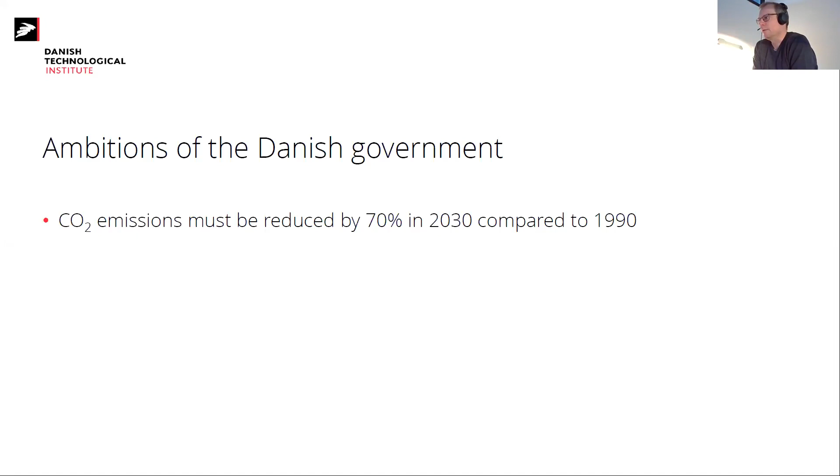In order to do this, they defined what was called 13 climate partnerships for different industries, in order to see how realistic this goal was. Concrete was actually part of 2 of these partnerships: one on building and construction, headed by the contractor Aarsleff, and the other for energy-intensive industry, headed by Aalborg Portland, which is the number 1 CO2 emitter in Denmark. So it was only natural for them to be heading this partnership.

The graph on the right shows benchmark values for CO2 in terms of CO2 equivalents per square meter per year, defined during these climate partnerships. It's a value around maybe 10, 11, 12 kilograms of CO2, and the goal is by 2030 to have it reduced maybe down to 4.5 CO2 equivalents per square meter per year. So it's a very ambitious goal.

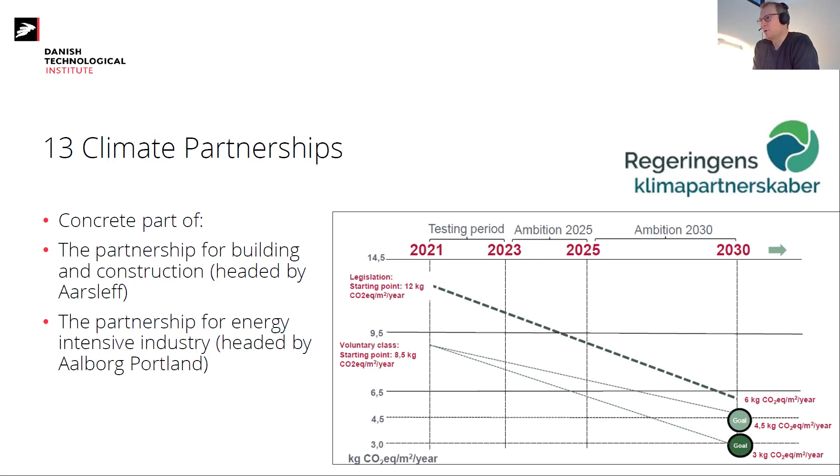Next slide please. The concrete initiative was actually launched before all of this, but it aligns very well with the government's idea. It was launched by the Danish Concrete Association. The aim is really to reduce CO2 by 50% compared to the 2019 level, which is completely aligned with the government's ambition compared to the 1990 level.

The idea is to gather the whole value chain, and currently there are more than 70 members, still increasing. There are workshops and conferences organized, and one of the very important things is also to have partner projects as case studies, in order to try out new initiatives and have them implemented in practice to ensure that we reach these goals.

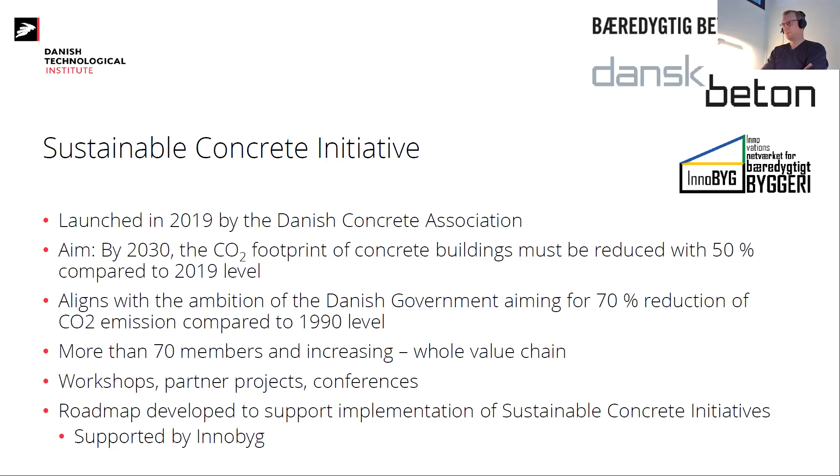One of the fundamentals for this work was really, in the beginning, to have a roadmap which could describe a path towards this goal. In order to do this, we had a dialogue with the whole value chain in order to identify specific initiatives which could be implemented into this roadmap. Please, next slide.

Yeah, this is just you can see more about it. It's currently in Danish, but this is the homepage for this initiative. The roadmap itself, which I will come back to, is actually also in English, and you can find it under publications on this webpage. But maybe this will also be translated into English in the near future.

Next slide. Then what I will talk about is this roadmap. It was launched and published in 2019, and it describes 35 initiatives categorized under different categories. One of the important things for this roadmap was to actually have a baseline, so we spent quite a long time trying to define how different types of concrete, how much in volume were used of this in 2019, and the equivalent CO2 of this.

This is the baseline, categorized into ready-mix concrete, elements, blocks, paving stones, and pipes, and also categorized according to whether it's a civil engineering structure, small housing applications, or larger buildings. This was the baseline and fundamentals for trying to have these 35 initiatives and estimate the time frame for implementation of different initiatives, and also make a rough estimate on the CO2 reduction potential.

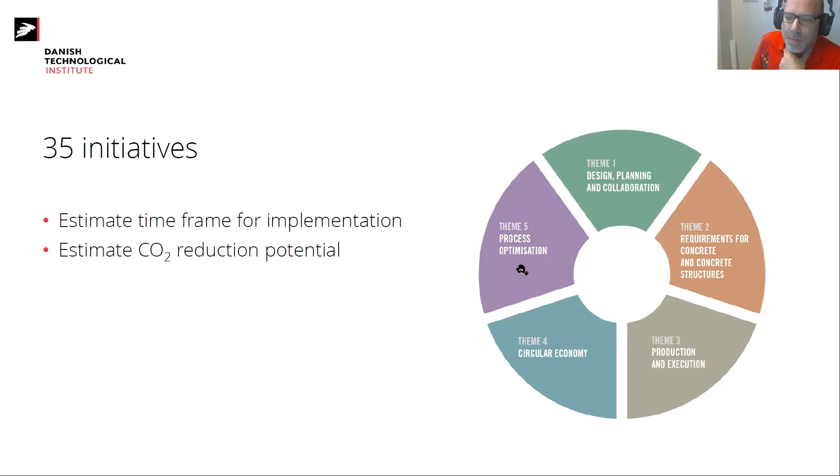Basically all of these 35 initiatives are focused on either of 8 ways of reducing CO2, which is either having greener cement or binders, green concrete, optimized use of concrete, and so forth. So this is basically a very quick overview of what's been going on, and this roadmap is defining the work currently going on in Denmark.

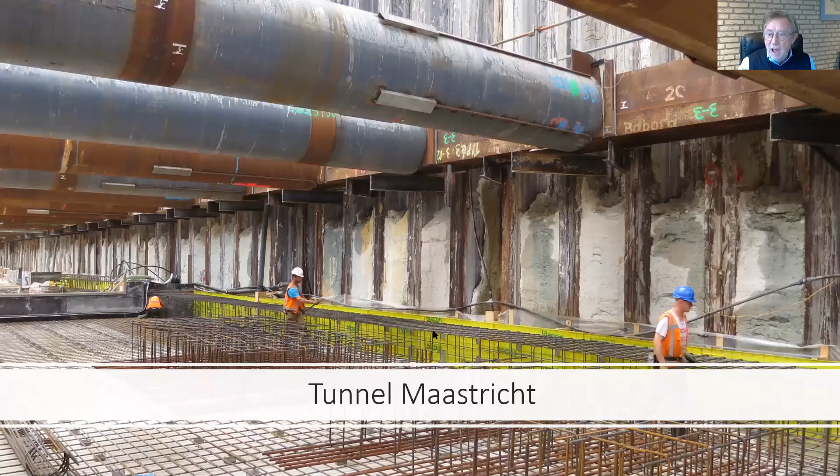I first will show you some projects. That's a tunneling project, tunnel Maastricht.

Just an information, very short, very sorry to interrupt you, but you can also forward yourself. You should have full control over your presentation and your slides. I will try so.

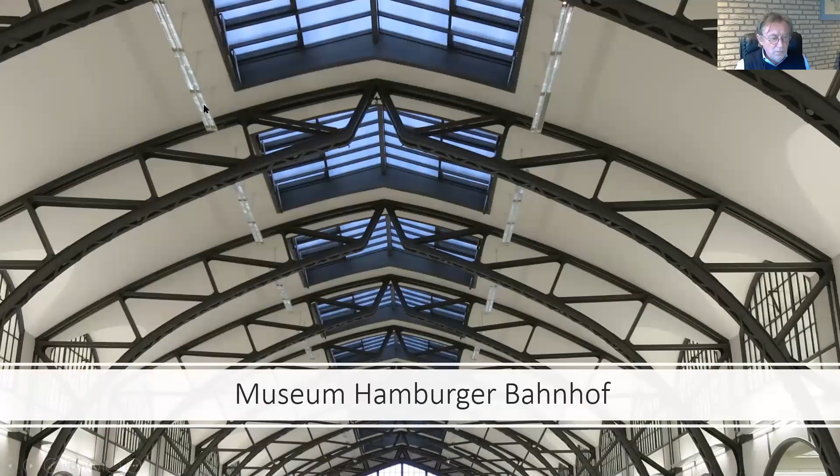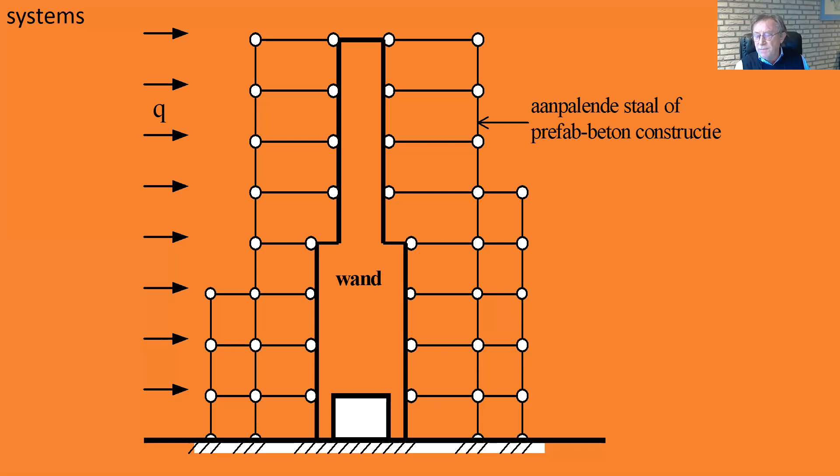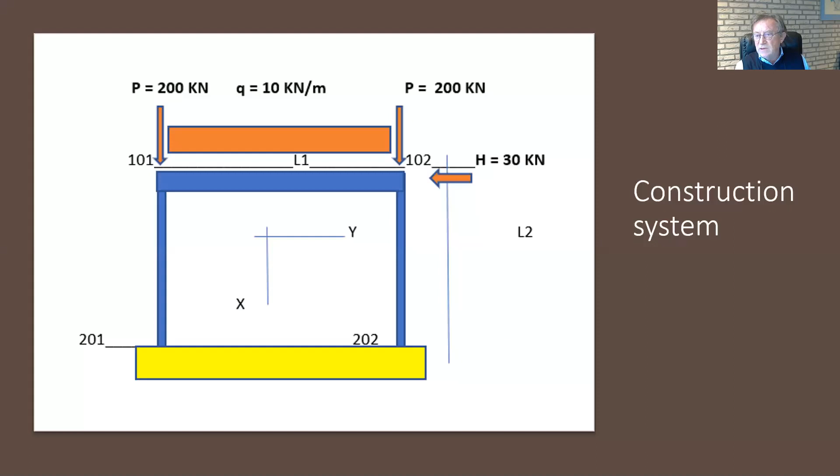Because the structural engineer has to make his schemes, like you see here, for example, for a high-rise building, or this one. And here you see what the structural engineer is designing.

So what's the focus of a structural engineer? The focus is mechanics and mathematics, and he has to deal with strength, stability, and stiffness. In order to make his calculation, he needs the proper material properties for compression, tension, shear, torsion, modulus of elasticity - quite important.

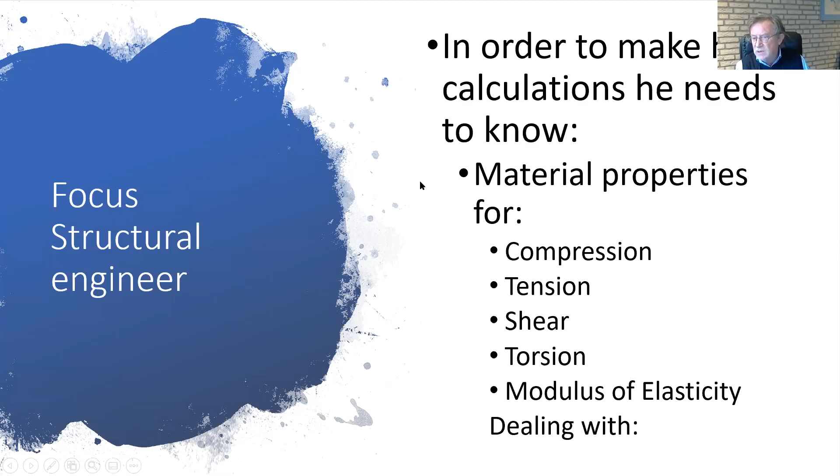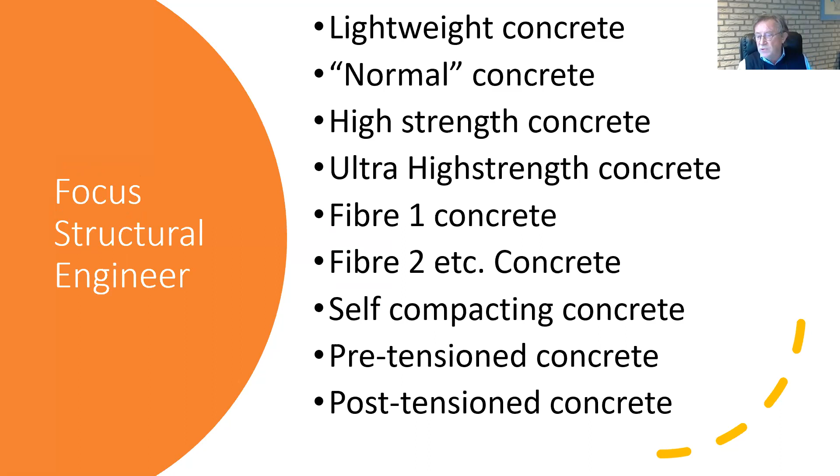And he has to deal with material behavior: bond stresses, shrinkage, creep, relaxation, environmental aggression, cracking, safety statistics, fire resistance, ductility, temperature problems, fatigue strengths, freezing, thawing, curing. And then we have a lot of concrete types: lightweight, normal, high strength, ultra high strength, fiber concrete, self-compacting concrete, pretensioned, post-tensioned, and so on.

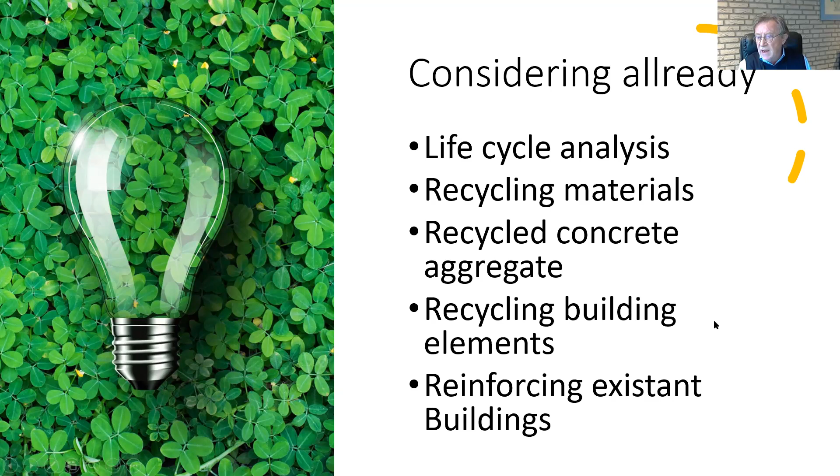Considering already, the structural engineer does his life cycle analysis. He is concerned about recycling materials, recycled concrete aggregate, but also recycling building elements and reinforcing existing buildings. And now we have the carbon footprint in order to save the world.

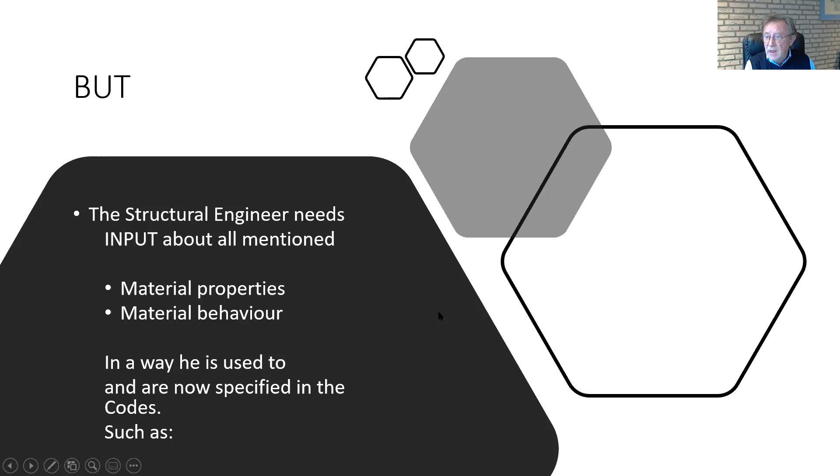We are badly in need, like the previous speaker showed us. We need low carbon footprint cement, or less cement, or substitutes - or other additives. And the structural engineer needs all the input of material properties and material behavior for all new materials in such a way that he can use it in the codes that we have now - compression, tension, shear, torsion, etc., dealing with the same things I already mentioned.

That's the way the whole world is thinking about the structural engineer - as a Calimero in a room making his calculations. It's a completely wrong idea.

How is it organized? Well, in Holland and in many other countries, we have a structural engineer for all different things. We have a structural engineer for the design. We have another engineer for constructive coherence. We have another structural engineer for detailing. We have another engineer for the control of the detail engineering. We have a coordinator. So the whole design is split up.

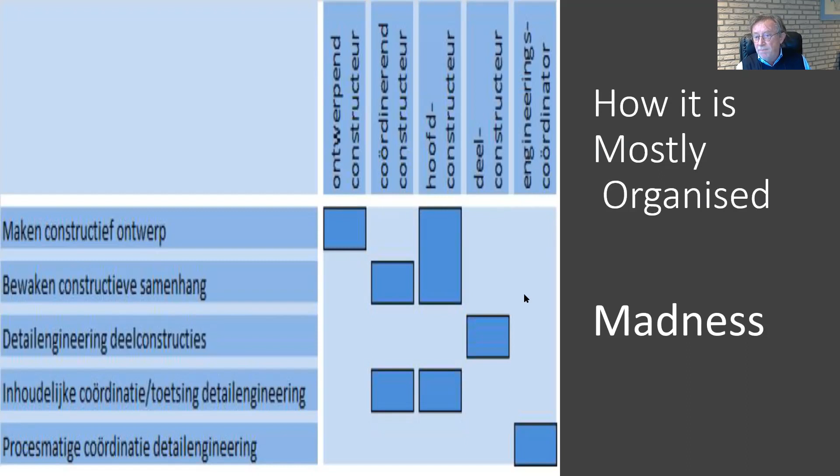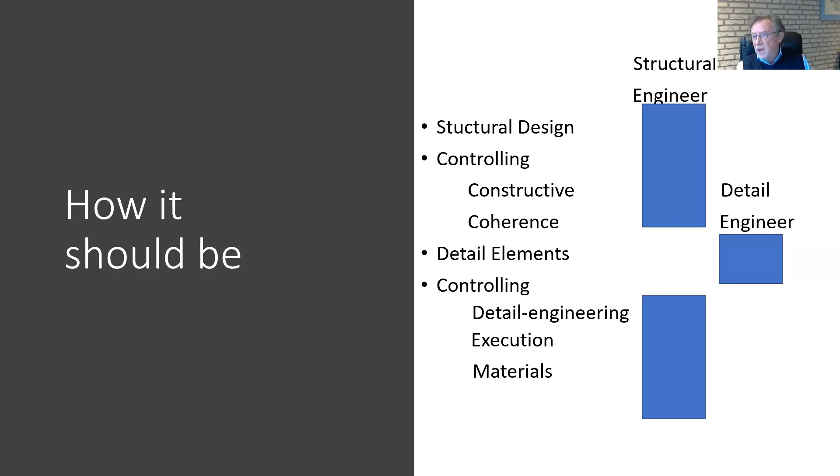And how should it be? Well, it should be quite easy. We have a structural engineer dealing with everything, and that's just one person. He knows what he designed and he knows all the inputs and outputs of the building.

And the structural engineer, I'm sure he is ready and capable for all aspects regarding carbon footprints, because he determines the structural dimensions, the steel quality, the concrete quality, and the desired strength over time.

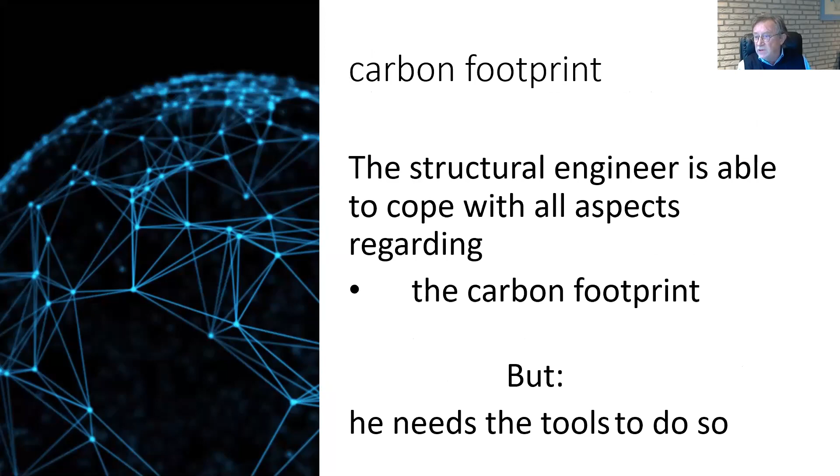The structural engineer is capable to cope with all the aspects regarding the carbon footprint, but he needs the tools to do so. Therefore,

invest in research for new concretes now and support pilot experiments. These pilot experiments are the first thing to do to make a better understanding of a low carbon footprint.

And then the structural engineer has to realize that he's the best, better than all the rest. Time for questions.

Thank you very much for keeping to quite a scheduled time despite quite a high number of slides. I thought I only had 5 minutes. No, I was taking the time that Boudewijn gave me before, so you were allocated a few minutes more, but it's fine, it's perfect.

Then we can use this time for questions now and also later. Let me start with a short comment, because I think I could underpin what you were saying, that structural engineers in the future have to learn much more about everything in a more holistic way. And indeed, they have to become something like superheroes to change everything.

There's only one comment I'd like to raise, and I apologize for this being a bit provocative, but I think that the structural engineer in the future is not automatically a he, because you always said it's he who has to do that. I'm pretty sure the structural engineer in the future will be a he or a she, so I think it's very important to mention that.

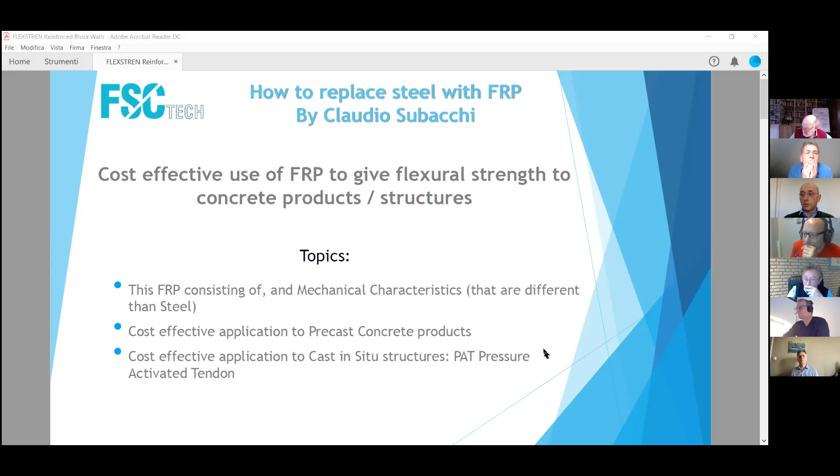FRP has a much lower Young's modulus versus steel, and this generates a little bit of difficulty, because most actual structures are normally designed to be steel reinforced, and when you try to use FRPs, a lot of problems come up.

First of all, being more elastic, they stretch more, so it's more difficult to control cracks, meaning you need more material to compensate that lower tensile modulus. Also, up to now they have always been used as a steel replacement, meaning you can find FRP bars that have sizes very close to what you find with steel.

But since they are a composite material, they don't exactly behave as steel does, in the meaning that if you have a relatively large section, the larger the section, the lower the specific strength. So having a very large FRP section is not paying off, meaning your specific strength goes down, so you need very large sections, and consequently it becomes extremely expensive.

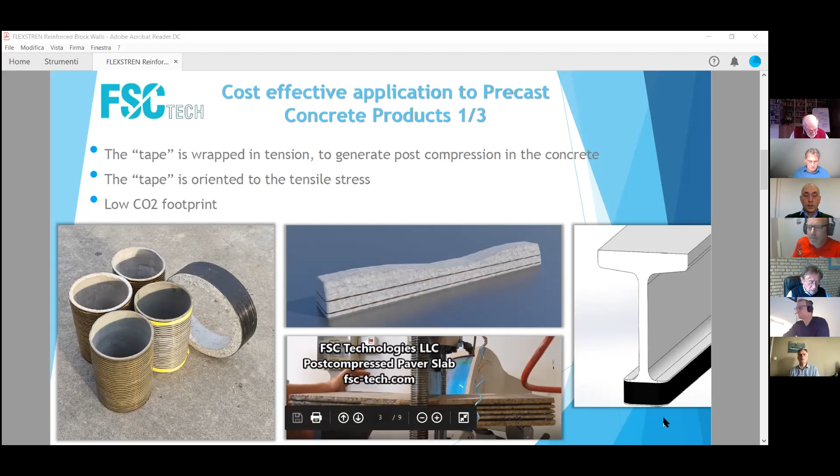We did that on pipe. We are studying applying it on a railway sleeper. We already did it on slabs, paving slabs, about that size, and we are thinking to do it also on the bottom of beams, girders and so on, the same technology.

Milled around to generate slots, and those slots are being filled with that fiber in tension. Basically, each single block has been post-compressed in two directions, and that block is mounted together in a wall.

Mounted together in a wall, generating a wall that has a behavior completely different from how walls made of that kind of material normally behave. This wall has a pseudo-ductile behavior.

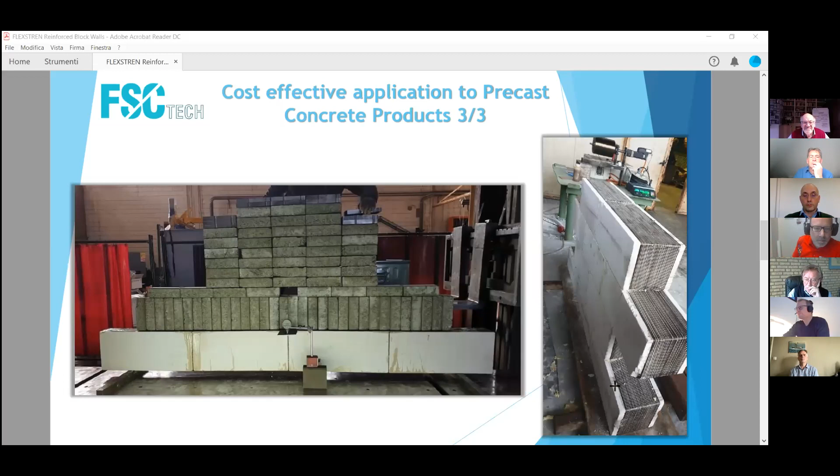That is another thing we developed for pre-stressing on job site casting. Basically it's a pressure activated tendon. It's something possible only with composites. Basically this is a tendon, a hollow tendon that, when pressurized, gets longer.

That is possible because of the ratio between the radial and the axial wrapping of itself, and that permits multi-directional pre-stressing. You can go in any direction, together with many other advantages, like in fire resistant buildings, where this thing becomes also an active cooling system for the tensile element.

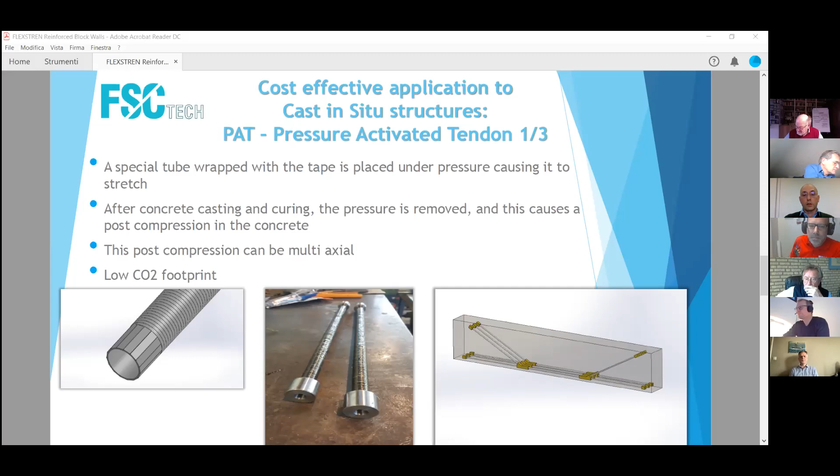Go next. Here is showing how this could also be done for reinforcement, to move the pre-stressing in various areas, and this is showing that it could also be done as a bidirectional or multi-directional pre-stressing. Next.

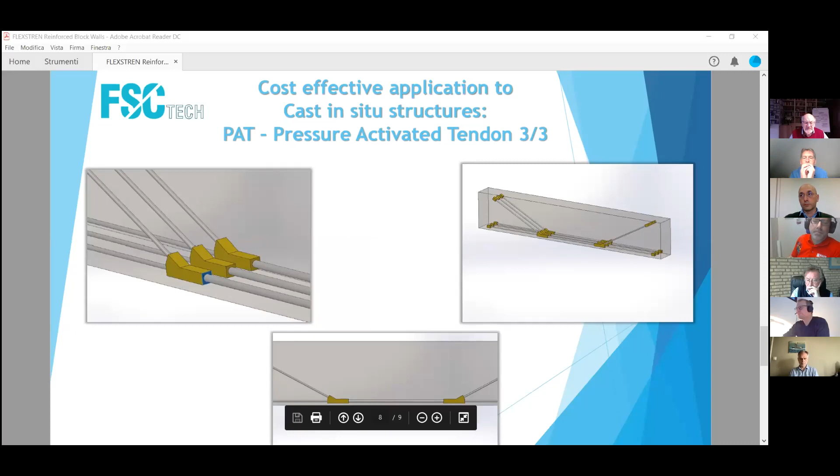Same thing, this also shows that the stressing is not actually applied by adhesion between the concrete and the tensioning element, but is done by compression of an area, the blue area you see on the left, top left picture, more or less like what happens in post-tensioning. Go next. And that's it.

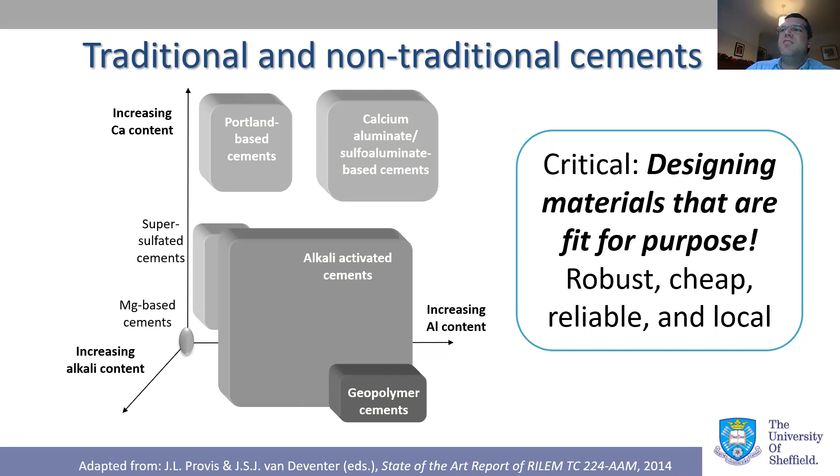In our toolkit here, and I'm talking in a toolkit approach, we have the saying: if you only have a hammer, the whole world starts to look like a nail. So our view of the problem is defined to a large extent by the solutions that we think we have available to us. If we think we have a one-size-fits-all material, we'll end up with a one-size-fits-all solution.

When I talk about ideas and innovation, does it need to be a new idea? Nothing is really a new idea, in all honesty. People keep writing papers about new cements, innovative cements, novel cements - this has never been done before. And if they dug into some older literature, they'd largely find that it had been.

Sorel cement, magnesium oxychloride cement, that goes back to the 1860s. Calcium aluminate cement has 100 years of history. Sulfo-aluminate cements have been around since the 60s. There's an old biblical saying which is, I think, relevant in this case: there is nothing new under the sun. But there are new opportunities for these materials which have had the chance to become established before, but for various reasons have been crowded out of the market or just haven't taken off.

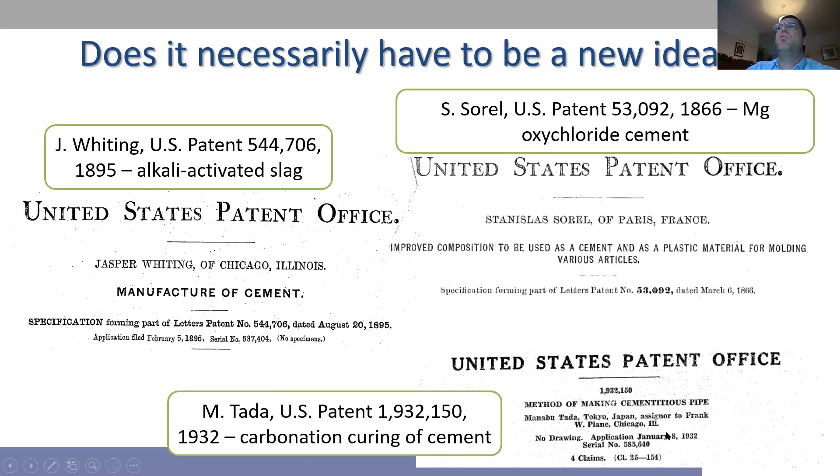And if I click, sometimes when I click it moves, there we go, sometimes it doesn't.

Differences in economic development levels or GDP per capita matter. Whether we're looking at developing infrastructure or repairing infrastructure, there's quite a difference in the types of material that will be ideal for a repair or retrofit usage compared to a first-off construction usage. Also, differences in availability of byproducts from other heavy industry, coal ash, blast furnace slag, etc., tend to be concentrated in certain countries, not in others.

Differences in geology, differences in mineral resources. A lot of focus and effort has gone into clays, calcined clays, as a way to make innovative cements. This is important and very valuable if you're sitting on or near a clay deposit, but not everybody is. Some parts of the world have other mineralogical resources. Some parts have very impure clays, some have iron-rich clays, some have white clays - a very wide and diverse range of opportunities posed by geology and mineralogy.

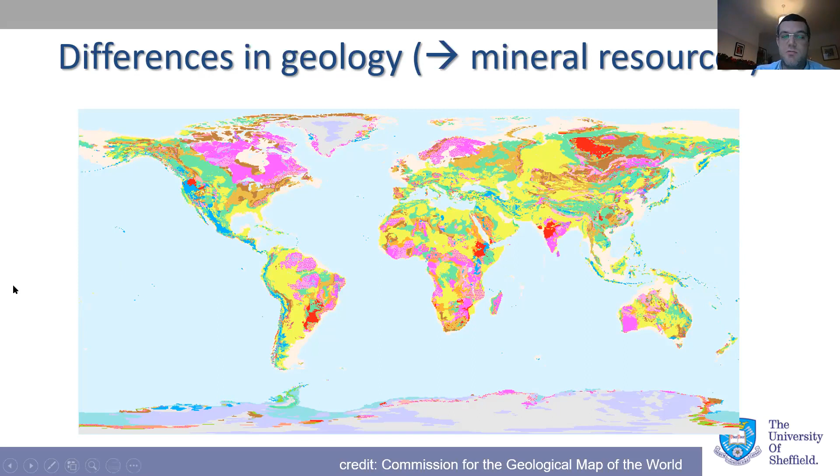What can we do with all of this? Where are we taking this, both as researchers and as engineers? Well, we need to ask questions. We need to consider very much more carefully - and in light of the last talk as well, my first point: does it need to be reinforced? We can get more precise on that - does it need to be reinforced with carbon steel?

Some cements that we can look at are absolutely amazing in protecting steel reinforcement. Others are utterly terrible. If you were to put carbon steel into a cement like that, I would start to question all sorts of things. It can be, or should be - these are questions we need to ask. Just because we can do something doesn't mean we should.

Factory production versus on-site production. I mentioned alkali activated materials.

John, could you hurry up a little bit, please? You still have time, but please hurry a little bit.

Yep. I mentioned carbonation curing cements - alkali activated cements need better control of curing conditions under ideal circumstances. You can use alkali activated cements on site, but they're a bit more sensitive to curing. Carbonation curing is ideally suited to factory production.

In terms of durability, we don't need to design everything for eternity. We design fit for purpose. If you're pouring a footpath, chances are someone with a digger is going to need to get at the pipe underneath that 5 years from now, rather than 200 years from now. We need predictive capabilities in modeling to understand this, so we need to understand these cements. We need the fundamental research to underpin all of this.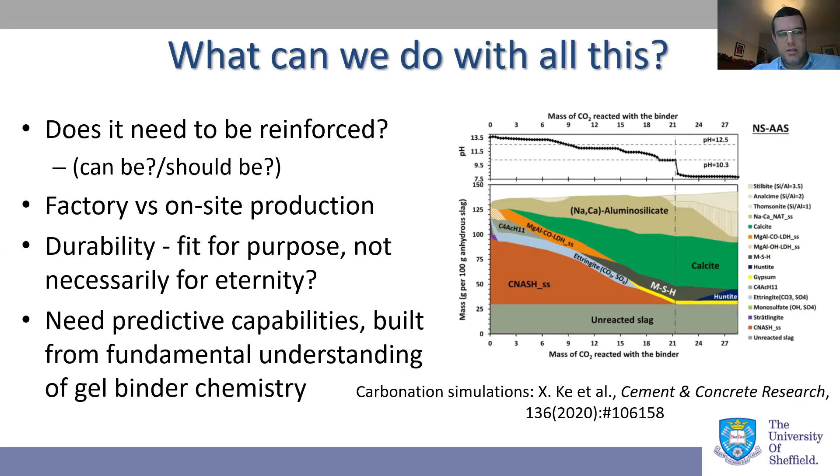Looking forward, we can and must tailor our cement to give the excellent performance we need in each scenario. There are loads of opportunities, but to leverage this we need high quality data - in the fresh and hardened states. The material needs to be usable and effective in service. We need the right applications. We need a robust material because there's a realistic chance our users will be what I'd call non-precision users, and this is almost unique among engineering materials - the impact that non-precision users can have on cement.

Both the material and the application need to be sustainable. We need to take a very holistic view of sustainability, which includes durability and needs to include economic sustainability as well - if something isn't affordable, it's not sustainable. We need the raw materials where and when they are demanded. And as a final point, where we have a specialty application, there are really interesting technical questions and opportunities that can come up from here.

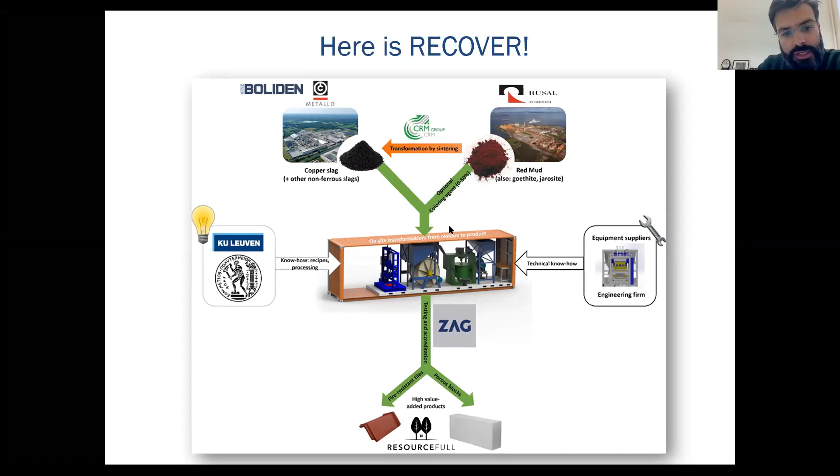So what was Recover about? It was about demonstrating in front of your eyes that we can make sustainable materials. So it was about actually creating 4, which became 6 eventually, mobile units, 20-feet containers.

As raw materials, we would be using bauxite residue, red mud, or copper slag. There is a beauty in that aspect, in the fact that the red mud, 50% iron oxide, is converted thermally into copper slag, which means I'm somehow harmonizing the precursors. By doing that, I bring together the non-ferrous metallurgy into delivering this new OPC alternative binder, which eventually is going to be transformed into building materials.

The project is about to finish. We have, in fact, tomorrow the closing presentation. And this is pretty much what I said: we would be adjusting the residues in front of your eyes and create these new building materials, and there is no trap, trick, small letters or magic.

The intention also was that these containers will become the seed for industrial symbiosis. So if you would be actually seeing the whole process in front of your eyes, you will be demystifying all this alkali activation, geopolymer, inorganic polymer terminology, and you will understand that actually you can buy those things from the supermarket and have an efficient process.

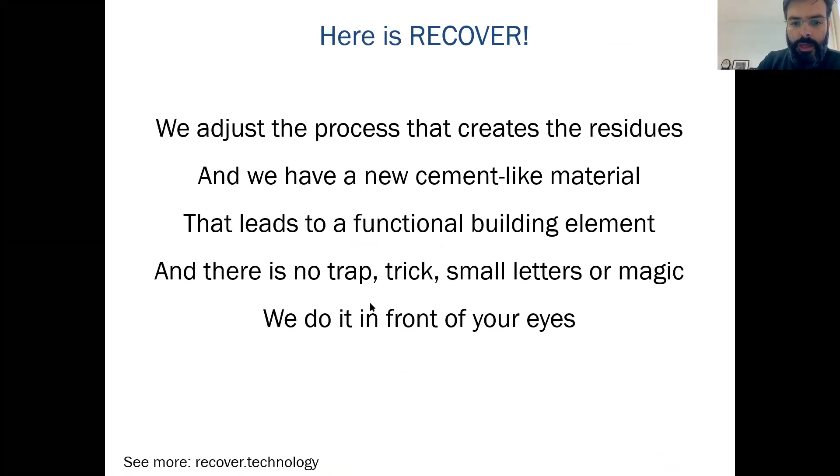Speaking about availability of raw materials, they are widespread in Europe. We have annual production of about 10 million tons. Keep in mind, we have the so-called legacy sites, a nice word to describe old disposal sites of bauxite residue, more than 100 million tons. And if somebody ever tells me that I don't have enough availability of raw materials, let me just say that we produce annually more than 2 billion tons of iron ore.

And when I need in my binders iron ore, I need 50% iron oxide. I can use plenty of bauxite, iron ore, and the likes. So there is enough out there. In fact, the whole formulation is based on the most abundant elements. So please believe me, there is no problem in finding resources, and you can also use non-residues, non-metallurgical waste.

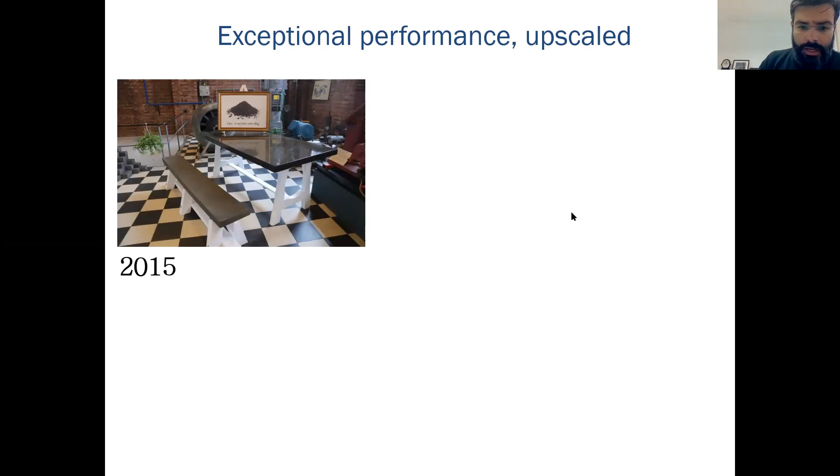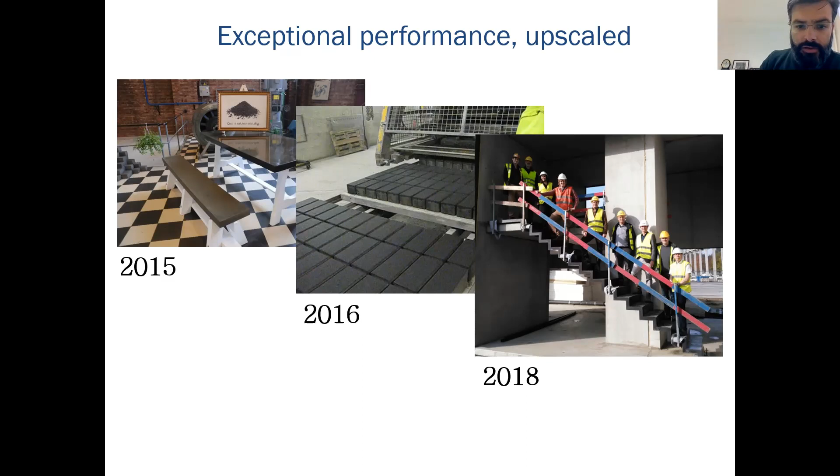You see the professors are standing where there is classical concrete. The believers stay in the front, in the center of the staircase. In all of these applications there has not been any cement inside. And in fact, instead of ordinary Portland cement, we call it extraordinary Leuven cement.

All right, let's go to the next slide. This is what I said already. You can see down the chemistry of those binders, abundant elements, more sustainable. We don't go to the 90% lower footprint, but it is still substantially lower. And I call these binders also democratic in the sense that you can find those materials pretty much all over the world.

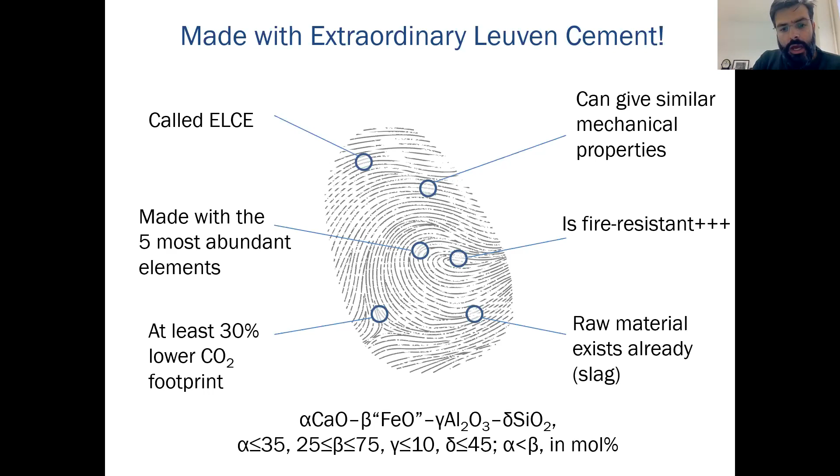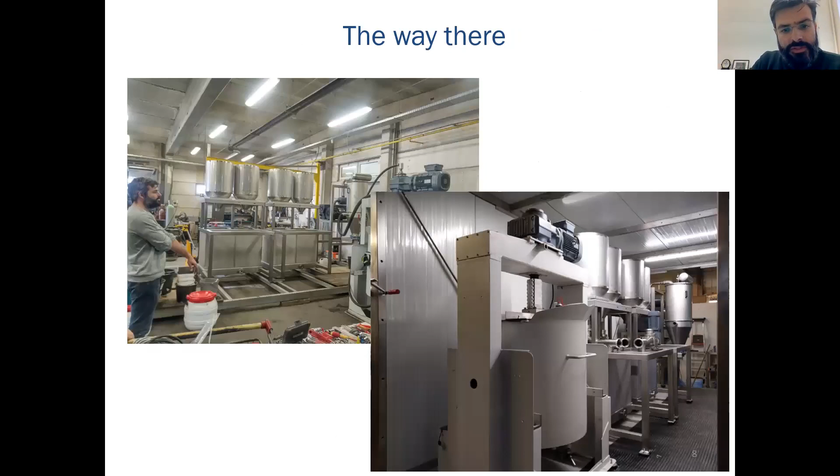Let's go to the next slide. These were some of the initial designs, and if you click more on the slides, you will see eventually how the design changed from one container to the next. Please keep on pressing the button. You will see now the real containers, and that was from a matchmaking event we had 2 days ago in Ireland, at Aughinish, the biggest alumina plant in Europe.

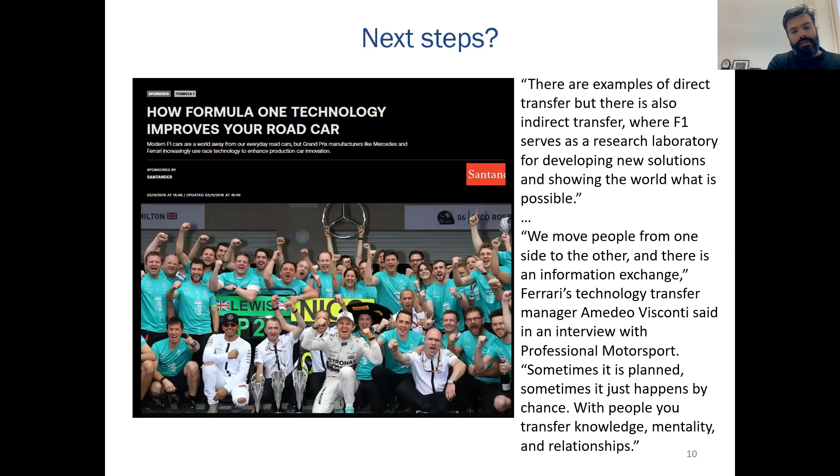So we also try to spread the news that this can happen and it can be an alternative reality, and it's about us doing it or not. Coming to the end, where do I want this to take it? I think science is amazing. I'm a professor and I enjoy my research, but at the end of the day, I think we have to demonstrate. So now we have an upscaling facility. We can produce 1 ton a day. And I believe that if we have these containers and actually give access to people to try to play with it, pretty much like Lego blocks, and then you make your own house, then you will build confidence, trust, and actually start developing formulations that are not based on classical cement.

My apologies for that. No worries, Yanis. I think it's quite role model behavior that you put your wake-up call to keep the time, and sometimes there's technical problems, so no worries about that. I think we are safe in this regard, and I would even say we have time for a question if there is a direct question. Otherwise, we can certainly also use the chat function. Is there someone? I'm checking the chat. I see some people are moving, but not really raising hands. So thank you very much, Yanis, for this presentation.

We can continue to discuss this later. And then I would like to come to the next speaker. And if I take a look at the schedule, it seems that's myself. That was a very funny surprise yesterday when I was asked to give that talk on behalf of, not on behalf, but let's say in collaboration with my colleague from Nigeria, Kolawole Olonade. Dav, can you share the screen? Kolawole is here in the room, but he cannot present because he's currently traveling. So therefore, maybe you can go back to the first slide.

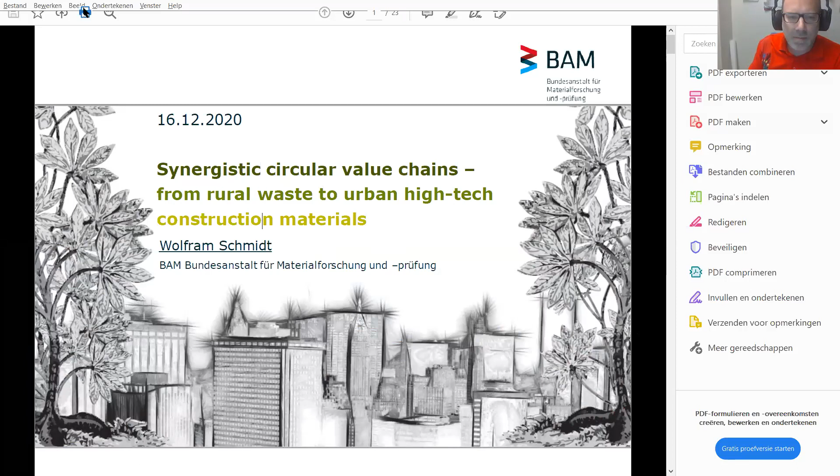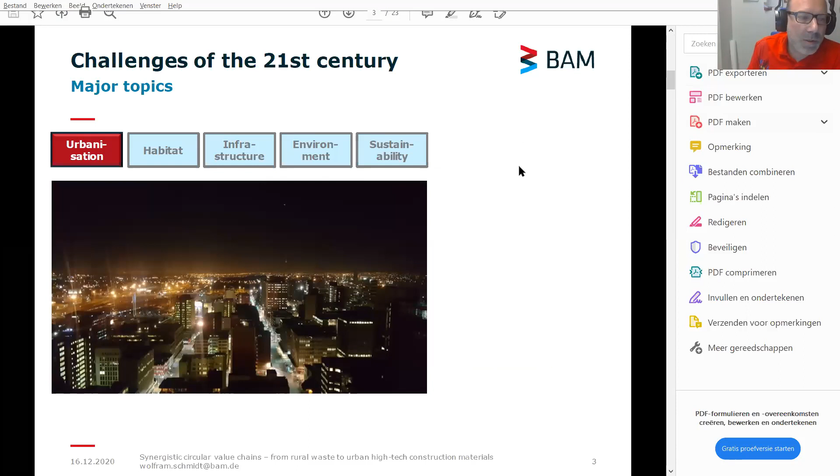Yeah, now let's come to the essence of the talk. If we take a look at the challenges that the entire world faces in this century, this is urbanization, next habitat, and also directly next, it's infrastructure, and then it's environment. And what we are talking all about is sustainability. If we take a closer look at that, we can identify that concrete plays a major role in all of that. There's a huge global demand for concrete, and that certainly makes all of us who deal with concrete responsible for a huge amount of carbon emissions. Concrete, as Karen Scrivener always underpins, is nearly half of everything that the world produces.

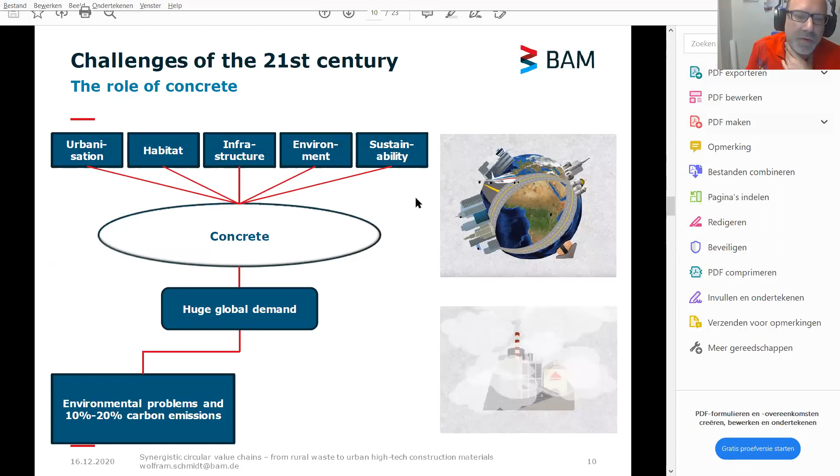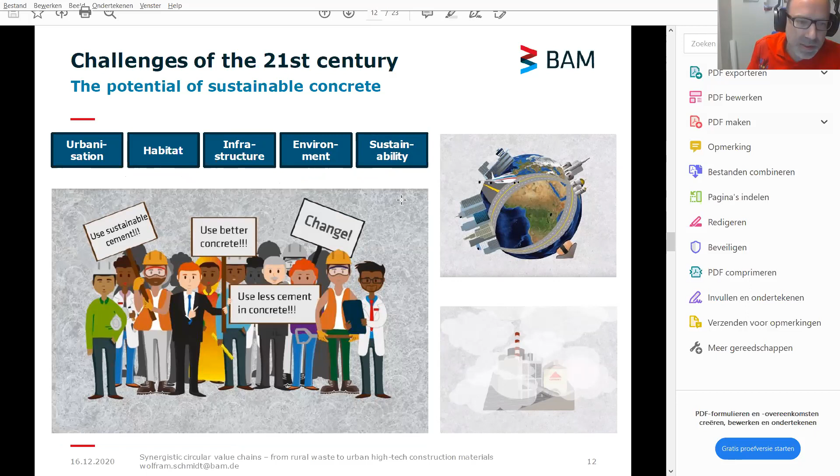This is a challenge on the one hand, but on the other side, it's also a huge potential, because as we use it that much, it can create tremendous leverage, and it can become the key for solutions in the future. But we have to find ways to use more sustainable cement types. We have to use better concrete in general, and we have to use less cement in this concrete that we're using. And we will identify that Africa plays a major role in this. So this is not going to be changed in the Netherlands or in Germany or in Europe, but those places where the major construction activities will take place will be in Africa.

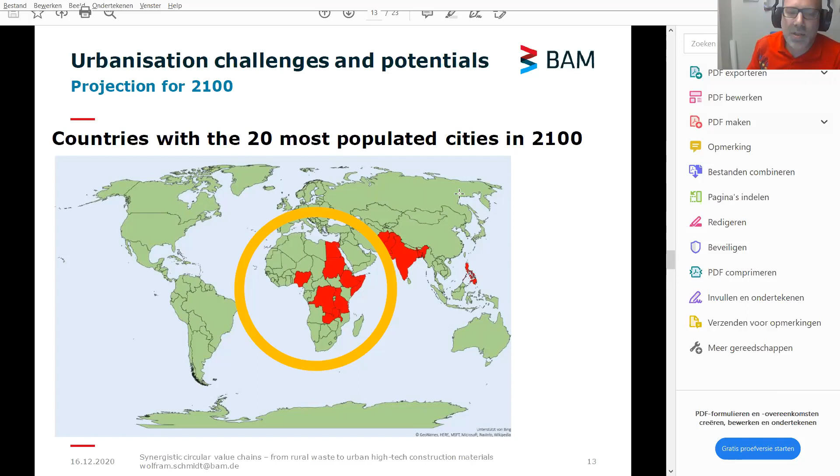13 out of the 20 most populated cities in 2100 will be on the African continent, led by Lagos, which will have about 88 million inhabitants, so more than the whole country of Germany, just in one city. So there is a huge demand for construction. And the big potential that African engineers do have in the next 3 decades is that 80% of those urban structures that will be built in 30 years have not yet been built.

So they can be built directly in a sustainable way if we just change the mindset globally. The good thing about Africa is that the per capita carbon footprint in Africa is below the threshold expected to keep temperatures below the 2 degrees Celsius increase until 2050. So all other countries come from above. We all have to give up on privileges while Africa can develop green technology from a very good starting position.

But this certainly only works if we hurry up. We only have these 30 years now, and we should really hurry up. We can only try to create synergies between what is required on the African continent and what is available. Africa has a lot of agriculture and huge agricultural growth potential in the future, and at the same time there's a huge demand for urban construction. So we have to try to develop synergies from this, and there are a lot of potentials.

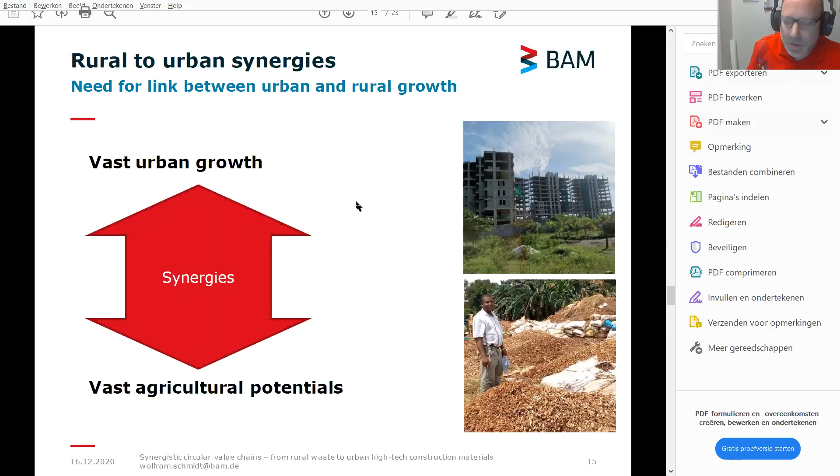I will try to elaborate on one example of cassava in Nigeria. Nigeria produces about 20% of the worldwide cassava production, so it's a huge resource. Today cassava is harvested, peeled, and the inner core of this cassava root is processed further to food. Cassava is also known as manioc or mandioca or yuca or tapioca.

What remains is the waste, and this waste is poisonous to animals, so it cannot be converted into food. It wastes a lot of space, it requires a lot of space when you dump it away. What typically happens is it pollutes the environment, it's stinking, there's no further value of that. But what we can do out of that waste - it's really a waste.

We can convert it to an organic polymer that helps reduce the water content, thus tickling out more performance out of concrete. Then it can still be used as a co-fuel for any industrial processes. And what comes out is a pozzolanic ash, which can be used to replace cement in concrete or Portland cement in different cement types.

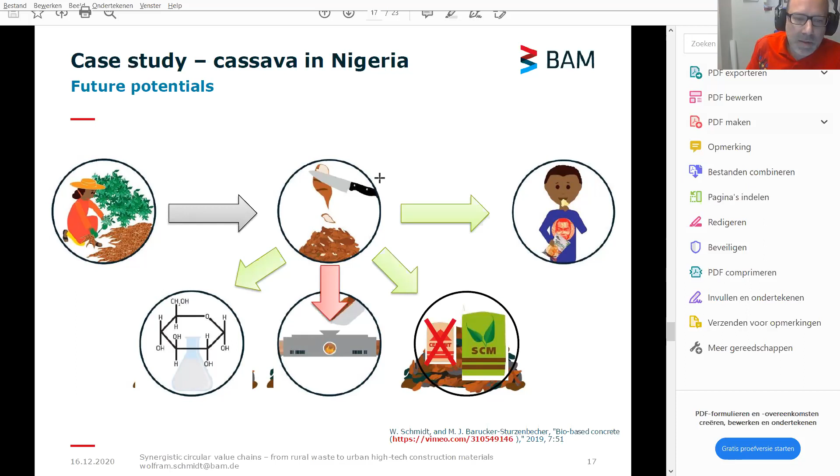This way we can create two non-competing new value chains, one in the construction chemical industry and one in the construction materials industry. At the same time, we can contribute to energy production. So that's an excellent value chain which helps the local economy.

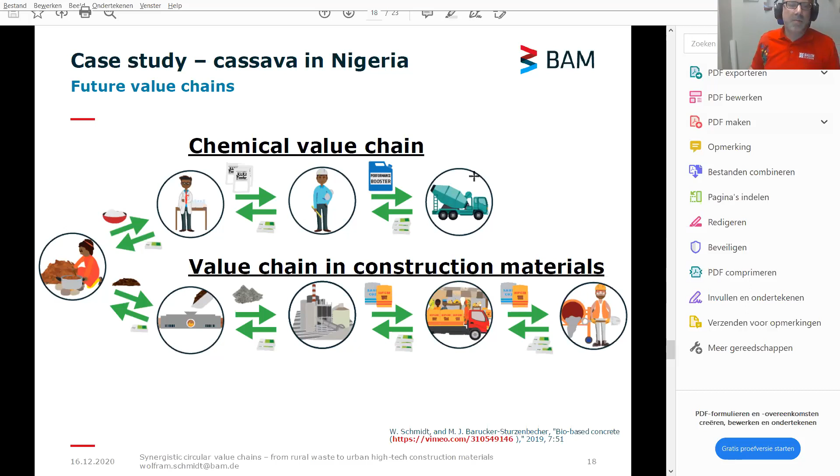It's not only cassava, it's a lot of different bio-waste which can be used. Here I did a study on how much of each country's total cement processing capacity can be replaced by bio-based ashes. It's not a tremendously high amount, but it's a potential and a contributor to reducing carbon emissions. It's not only cassava, it's also maize, rice, and groundnut, which are particularly interesting in Africa.

We've recently built a kiln together with my friend Michael Kome in Ghana, where we process these ashes and at the same time create the different interim steps like the organic superplasticizer we produce.

This way it's possible not only to deliver farm products to the cities, but also to make virtue out of the waste by producing materials, chemicals, and energy, plus additional precursors for the chemical industry. This creates new employment perspectives in the cities.

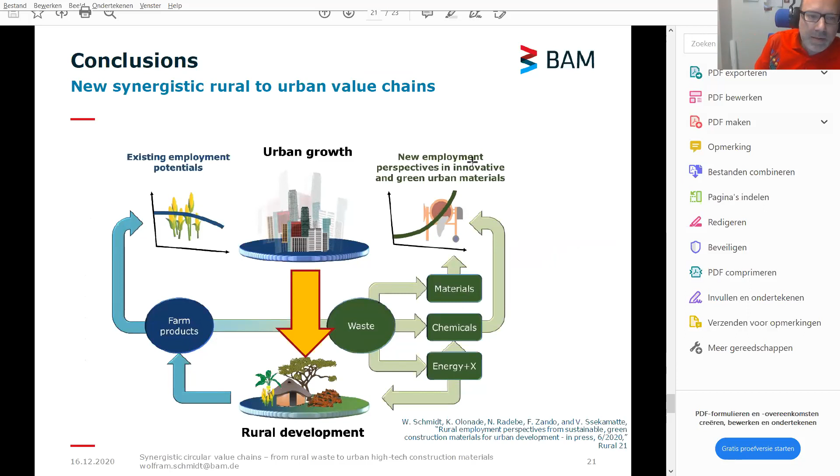This urban growth can also significantly contribute to rural development in Africa. With that, I believe that Africa and the entire global South can become a pioneer for green construction solutions. And with that, finally, I would like to thank you very much for your kind attention.

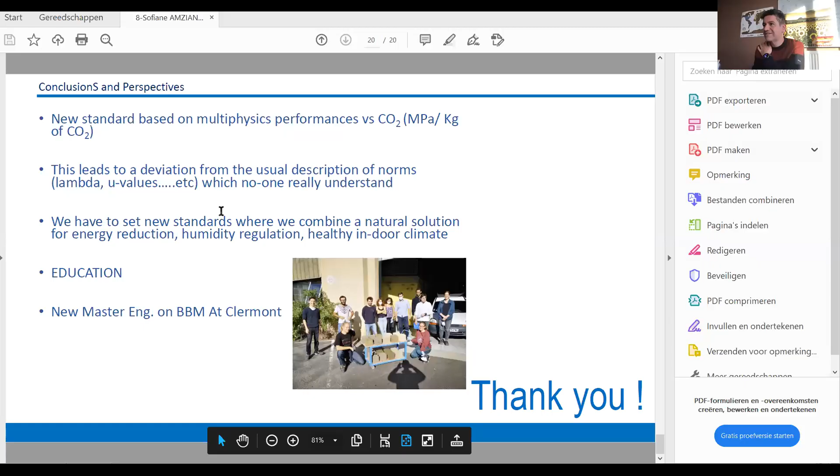I will try to be in time. You know, I talk a lot. I have stopped believing in that, Sofiane, but we will see. Thank you, Baudouin, for your invitation. Bio-beton is his word, it's not my choice.

My title is New Challenges on the Use of Biomass in the Building Materials Construction Industry, but I agree with his name, Bio-beton, because I know he was in France sometimes.

Next please. The actual context: we use a lot of sand and gravel to make conventional concrete, and we know there is a depletion of sand.

Cement is a concern due to the responsibility of this material for 5.6% of emissions from fossil fuel and decarbonation of limestone during the fabrication of cement.

For this, we have good performances in terms of mechanics, with 20 to 50 megapascals conventionally, which is 90% of the ready-mix concrete produced.

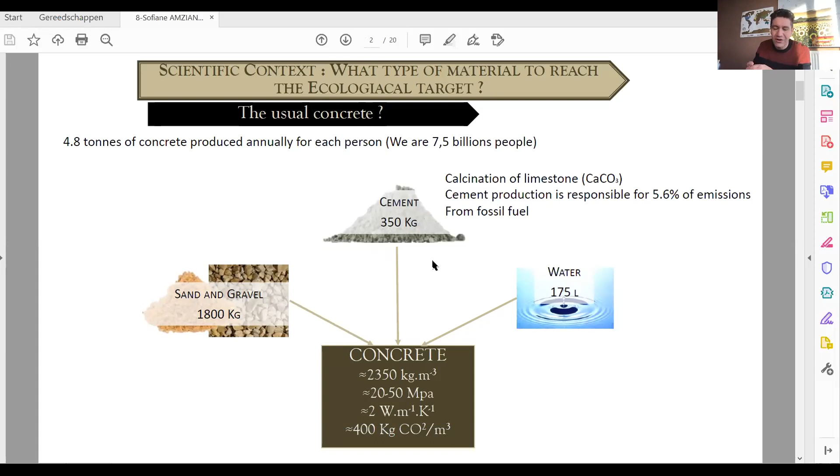I think vegetals also have to be at the base of the mix proportioning to have good material and to build with the good strategy. Next. For this, vegetal is good because it is the simplest way to make sequestration of CO2 thanks to photosynthesis.

This photosynthesis is a simple chemical reaction. With light energy and CO2, we can produce glucose, which is wood, and we can sequester 2 tons of CO2 to produce 1 ton of wood.

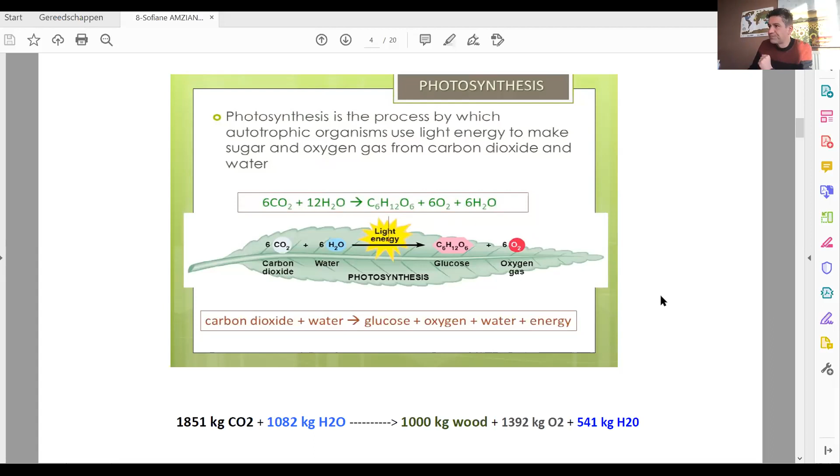Next. What is biobeton or bioconcrete? It's a vegetal concrete made with aggregate made with vegetal, permitting the sequestration of CO2 inside the concrete. We can use alternative mineral binders made with hydraulic lime, calcic lime, pozzolana, metakaolin, mixed with calcic lime. This is a simple recipe of bioconcrete.

We obtain a very lightweight material, non-bearing unfortunately, with around 0.2 to 0.5 megapascal of strength in compression, but very good insulation, with lambda of 0.1 watt per meter per Kelvin, and minus 150 to 200 kilograms of CO2 per cubic meter produced.

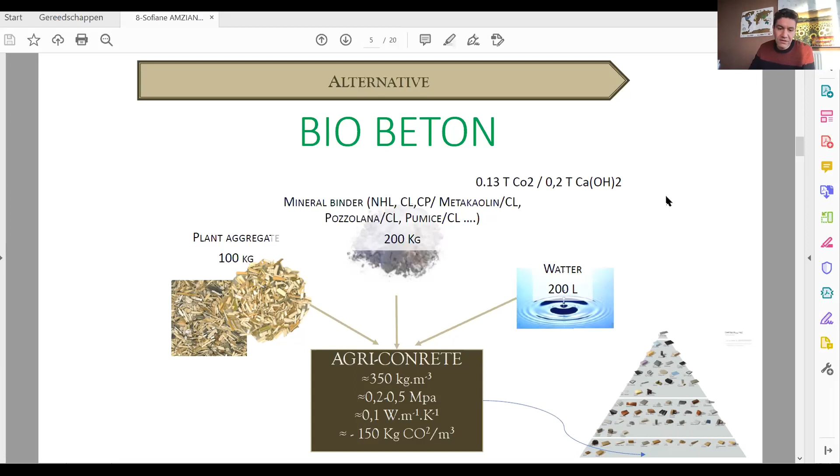This is one of the fantastic solutions to change the game in terms of CO2 emissions, not only dividing by 2 the emission of CO2 but neutralizing the problem of CO2 in the production of concrete and materials for building construction. Next.

What's going on here in France? Because if we need vegetal, we need an industry of vegetal. In France we have the chance to be the main producer of industrial vegetal fibers. What I mean by industrial vegetal for construction is fibers like miscanthus, hemp, flax, which is not for food.

We are number 1 in Europe with around 85,000 hectares. We can also use the non-food part of vegetals like sunflower, colza, and corn. We predict a huge increase of biomass use in building industry in France, because in 2021 we will have a new standard for insulation of buildings, based on CO2 emissions during new construction.

We will have a new standard that will oblige the constructor, the building industry, to use biomass in construction. Next. We have several opportunities.

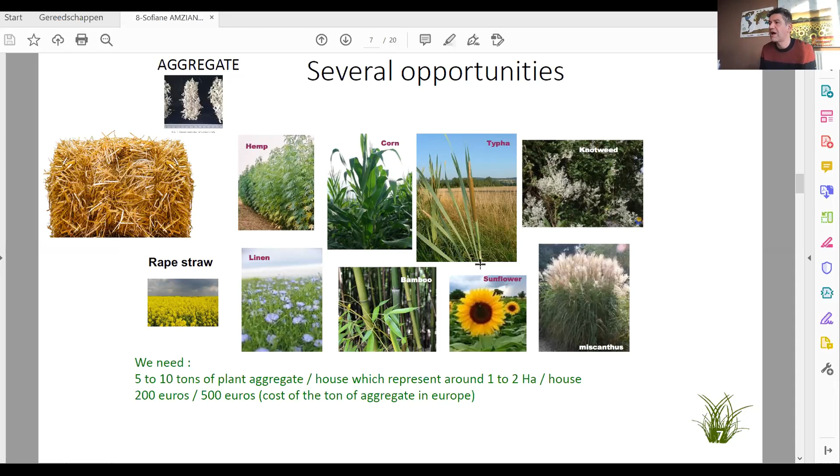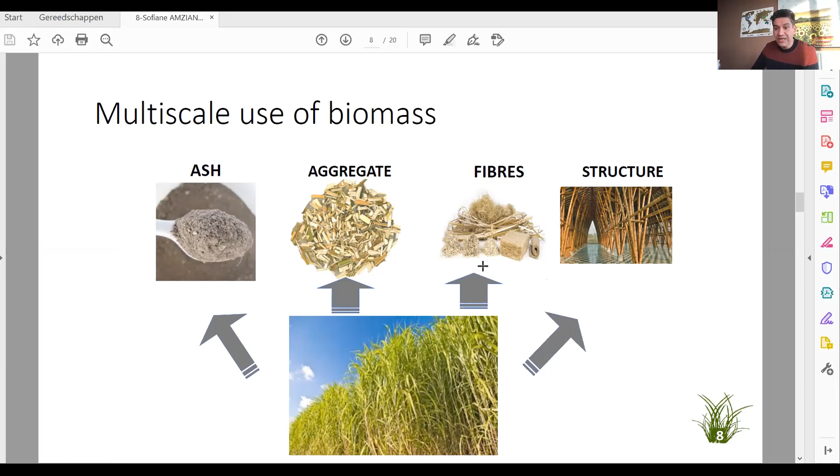Next. For example, for ashes, we can use a mix with Portland cement, a mix of ashes up to 20% or 25%.

There are a lot of papers published this year in 2020 and in the last five years on the use of ashes, of rice husk, of wood, or of miscanthus. After calcination, there is a pozzolanic reaction of these ashes with cement.

And also we can use the fibers to make roofs and walls.

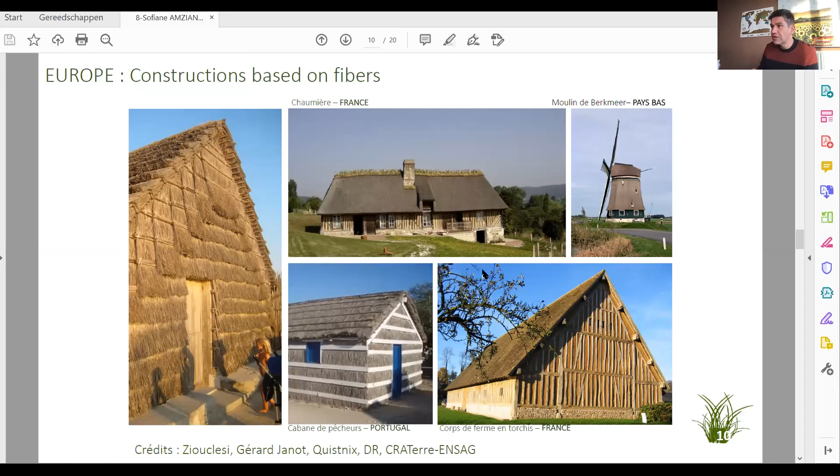And also I would like to talk about the fantastic dynamic of research around bioconcrete, for example with mechanical tests, bending test, compression test, hydrothermal, acoustical, and biodegradability of this type of material.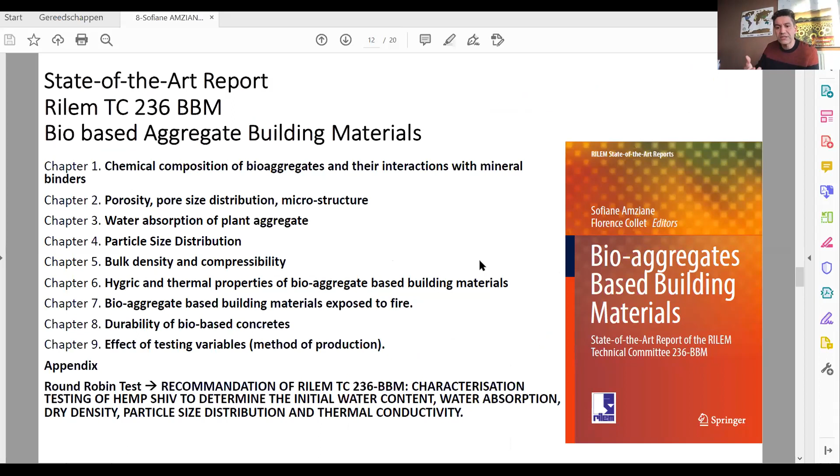Conclusions. Yes, I will conclude. We are going to produce standards because the industry needs standards to have assurance to provide building. Please go to the next slide, because I had 20... the last slide, please.

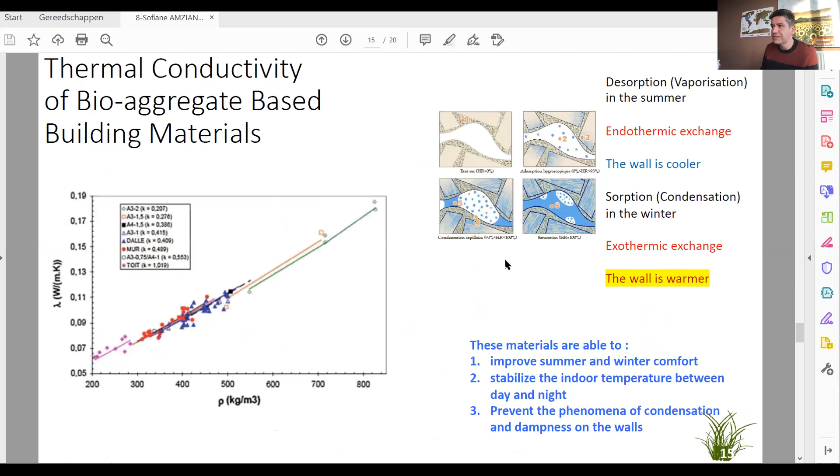I would conclude to say that we discovered in these 20 years that there is a very good alternative with vegetal concrete. And the more important phase will be in the next years: education.

For example, we started here at Clermont to launch a master's in engineering on bio-based building materials. Exactly, and also I think at Zurich there is also a master on biomaterials. This is very important to provide the industry with engineers in this field.

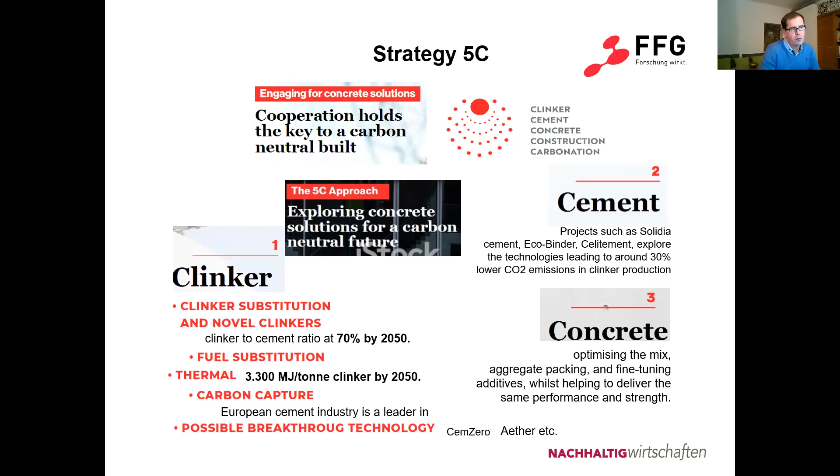Going back to our second C, that means you have to change the cement. Generally in Europe we have a clinker factor of about 70%, so we use CEM1 and CEM2 cements. When you go to other cement kinds like CEM3, CEM4, CEM5, or maybe in future CEM6, you have problems with the constituents. Instead of blast furnace slag, we could maybe use geopolymers, but that requires further research - so this could only be an invention for more than 5 years.

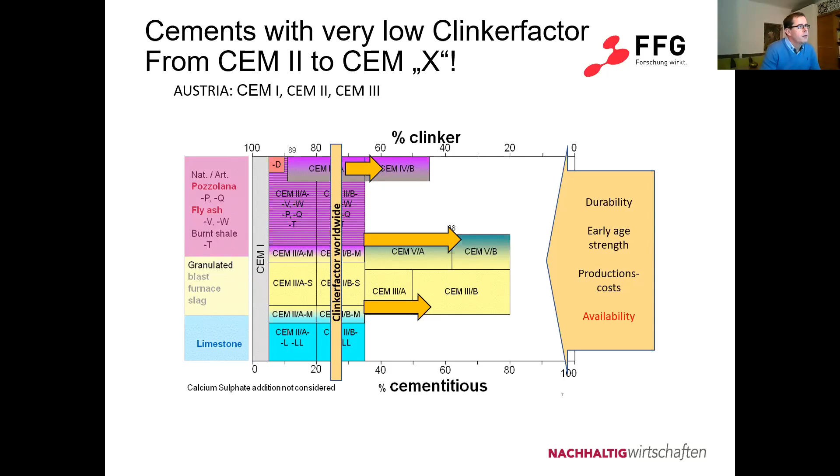To change - and you also heard from Professor Hovis today in his earlier speech - the way from hydration to carbonatization of the clinker, maybe this is an opportunity.

The problem behind them is, as you heard before, that you need new plans, new rules, new guidelines. This is also an invention for the future - not for tomorrow, but I think this must be a step for the next 10 to 15 years.

So when I come back to our strategy, what we pursue now in Austria, we are hopeful that this should be a good way to foster and boost carbon reduced constructions - how we can start our transformation. So what we need is a performance concept.

The problem is how we should start to get a performance concept. In the EN 206, it's generally allowed to use an equivalence performance concept, but nobody knows exactly what equivalence is.

So the basis now in Austria was that we have some guidelines based on such performance concepts, and the important guideline in Austria is for watertight structures. Watertight structure means we need low temperature and therefore less constrained tensions.

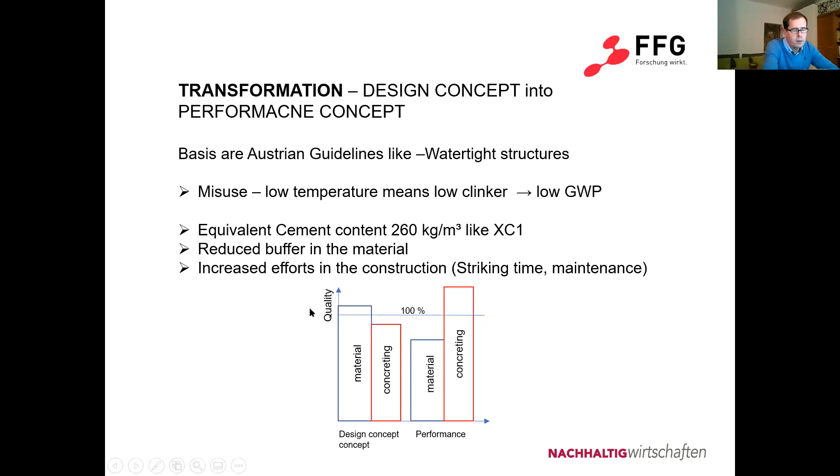What you have to do is find additional methods to equalize the efficiency from the material on the side of the concrete. That means we have increased efforts in the structure - keywords like striking time, maintenance, and maybe also early strength in cold temperature.

That's what we build - we find an equivalent, that's what we have to do, we must solve an equivalent concept to guarantee durability over a minimum of 50 years.

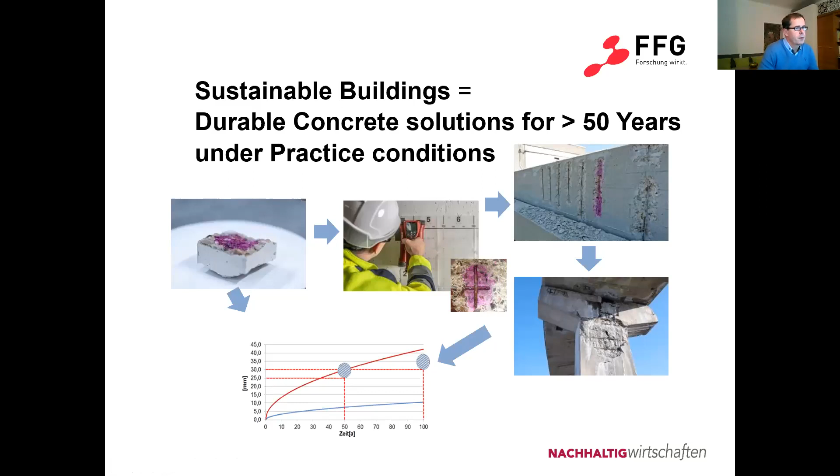You see here the testing procedure, what we use or think about using in our research project - I won't go into details. Maybe you can't read it either. What I want to say especially is that we also test the porosity, because porosity, in our opinion, is an opportunity to test the quality on the construction site.

Details for the testing results you get tomorrow from Mr. Hertel. We hope to summarize that reduced carbon concrete is not a problem, it is the solution for the future. I think this research project is a good basis to finish our performance concept on a legal way in this ONR standard. Thank you very much.

Thank you very much also for the final statement. I'm not really sure if it's really not a problem at all, but I think it's a challenge, and we are going to solve this jointly, hand in hand - events like this contribute to that.

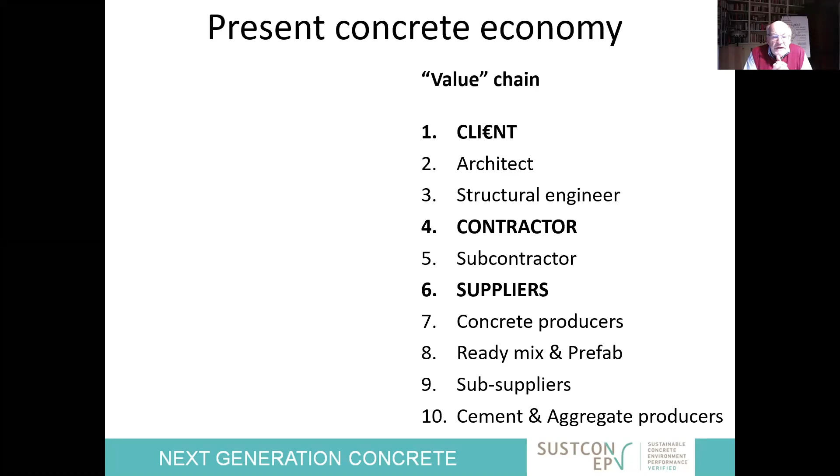This is the present economy, okay? The value chain from the client, architect, structural engineer, contractor, subcontractor, supplier, to the sub-supplier, the cement and aggregate producer. And what happened is that the cement and aggregate influence, I think, is a little overdone.

So normally what I learned is that it is the customer who decides what quality is, and he has the money. And so what happened is that the standards have been written by the sub-supplier. And towards the end, okay, go on, next, they have made lots of money where they have all the influence through lobby forces, the sponsoring.

I know I'm charging, but Wolfram knows me a little bit, he can temper me sometime. But the designer is material neutral. And he should say, I'm using wood, concrete, steel, or whatever, okay? And he should understand what's going on. But he does not get the information he needs right now. He only gets 28 days underwater treatment by 20 degrees. And then I ask, are you putting the building also 28 days underwater before you use it?

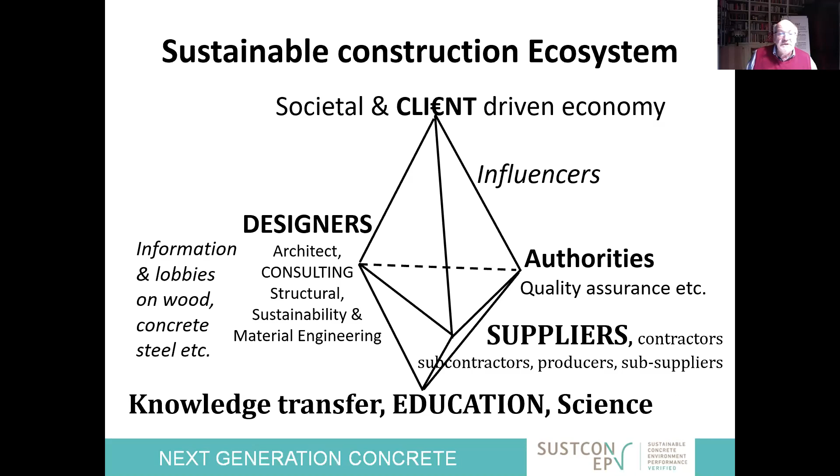Okay, next please. We have a system. We use this. We said, you do not need to have standards. If you want to do something correct, we will talk about that tomorrow, how we did the geopolymer pathway under the railroads of ProRail, not using any Portland cement in it. So this is basically the system I discovered in 2008, and I said, this is it.

You go and you look at the verification possibilities, become credible in what you say, okay? And that's all. The standards, I personally made the biggest progress with refractory concrete, where there were no standards on the composition of the material. If we decide to have micronized dog shit, or horse shit is easier to get probably, to put in the concrete, because I am responsible for the final product.

Where would we be if the steel industry would dictate how the car should be designed? Okay, so we have to grow up, and this is not against the cement industry. It is from the cement industry has only a profit if they have intelligent customers. And right now, being kept dumb is not the idea.

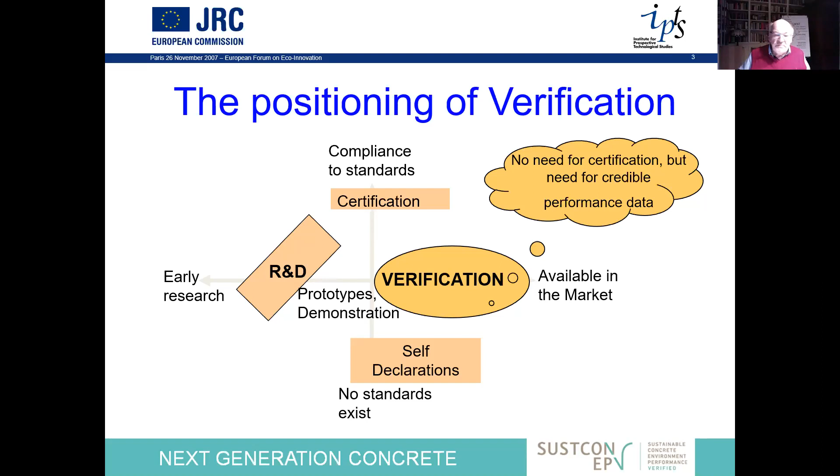Okay, so my call is for performance-based standards. We should agree on testing procedures. We can use water powder ratio for design of the mix. And what these powders are, they should be responsible powders. And this gives you a guideline. I totally agree. People do not want to let go of the EN 206 because they need guidelines. Let's give them guidelines, but let's evolve these guidelines because they are outdated.

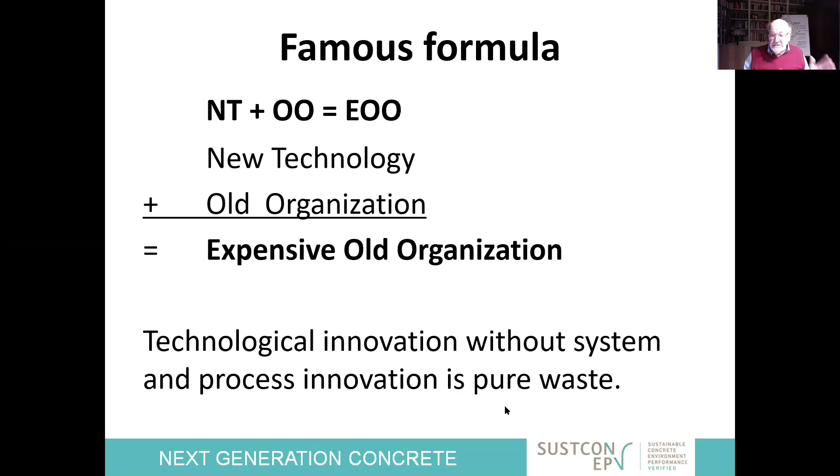If we have water binder ratios in the UK of 0.40, the same mix, 0.40, in the Netherlands 0.45, in France 0.66, in Germany 0.92. And if you say what you mixed in it, I am mixing in it, I all of a sudden have a water binder ratio of 0.36. So this is pseudo technology. Let's get rid of it and let's replace it with something serious. That is basically my thing.

Now, honestly, we have another hour. I would love to have Klaus and Kees Kleinman discuss more about the experience with the structural engineers, because they are going to be the key profession to change things. And the other thing is fantastic, what I saw, what Yanis has been doing with micro industry. Those containers, they are the future, because some community can start with something.

Again, well, many of you know me, that I'm getting very excited about injustice in this whole system. So Boudewijn, thank you very much for this final talk and statement. And yeah, well, by the way, this is only the beginning of the context we have here.